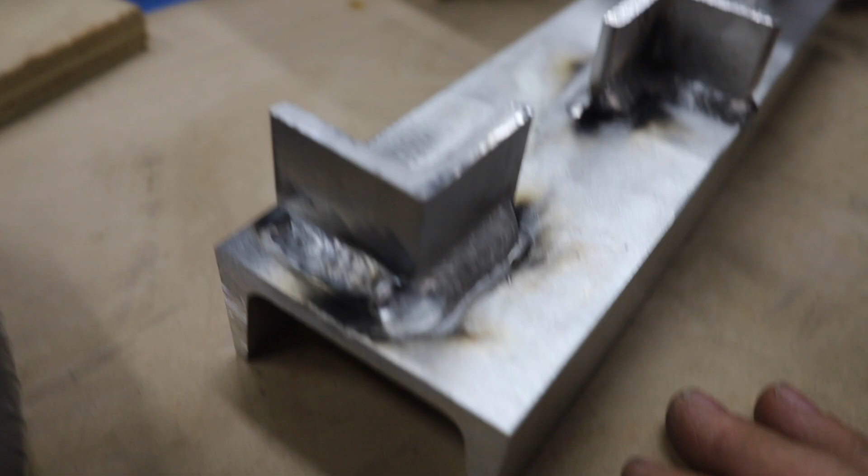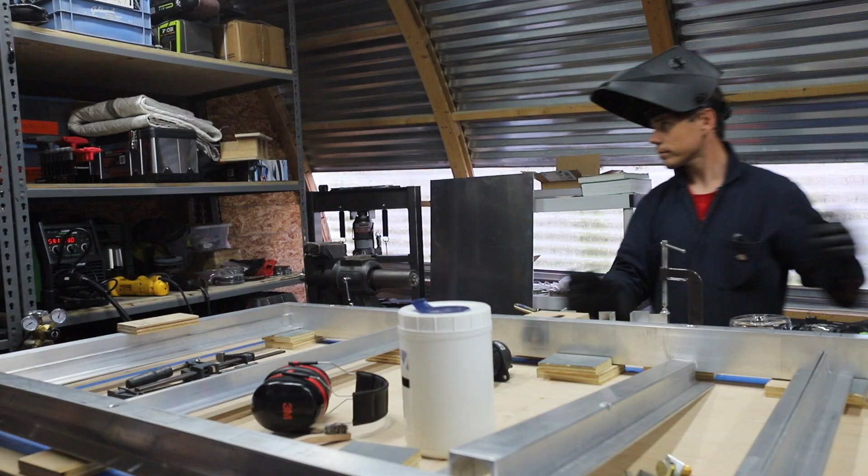Well, here we go. I don't know if I showed you my early practice welds, but here they are. While Christopher gets the frame ready for full weld, I am going to do a good bit more practicing. We had to move the welder over because we don't have long enough leads to reach from where it was. Kind of a pain, but I'll easily be able to reach the whole frame.

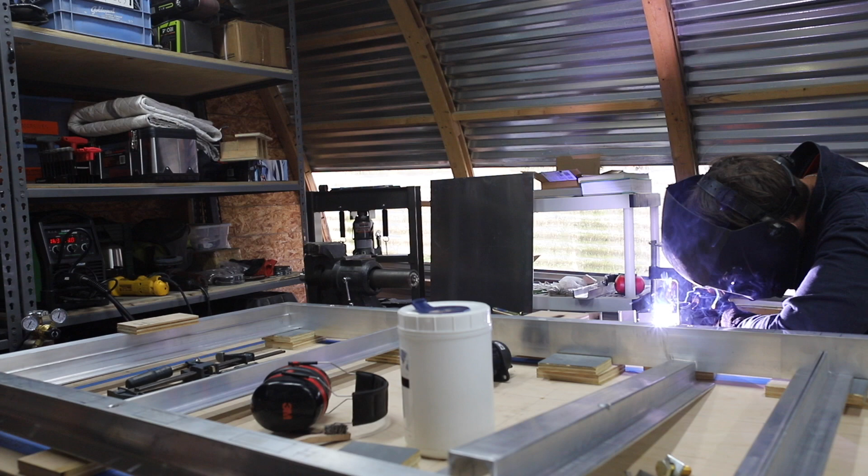Alright, let's do this thing. Any hobbyist welders out there looking to get into welding, go watch somebody else to learn. But I will share what I've learned: get your settings right, do some research to start with, and then fine tune what's good for you.

Get comfortable, being comfortable is important. And then practice your line a couple times before you actually strike the arc and weld, and get a good, solid, clean, smooth flow on your practice.

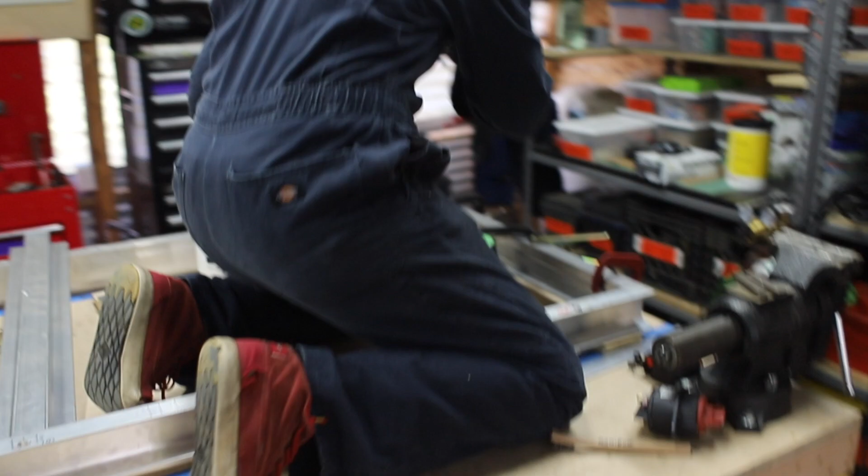So I talked Zach into giving me some spot welds before we continue so I can keep setting up. If these pieces are where they need to be, I just need to weld. And the guy just pops up on a table. Ready? Yeah.

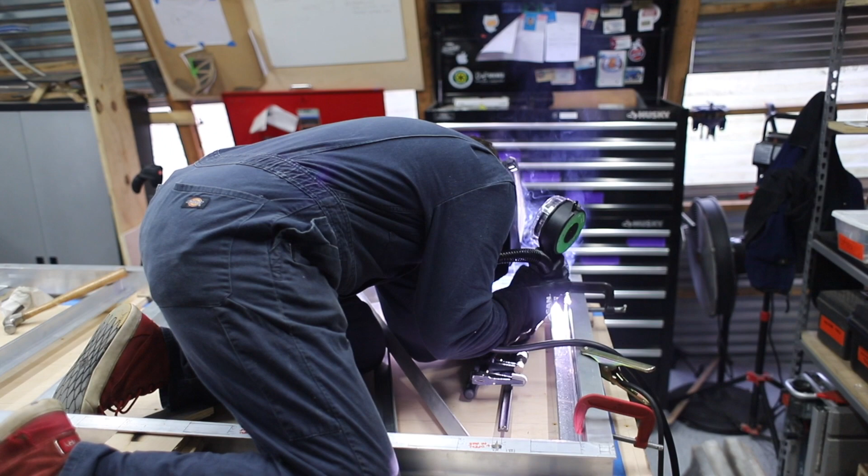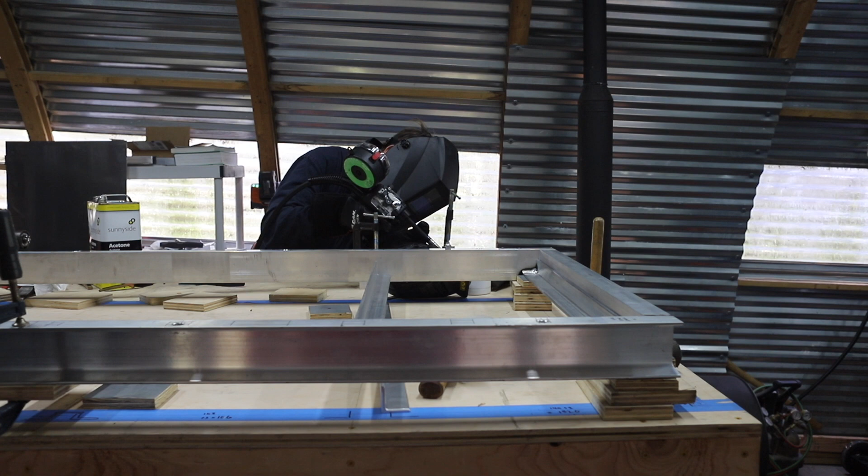Okay, I'm actually welding now. You're right, that's not a welder - that's the sound of me off screen with an oscillating tool fixing a mistake that I made.

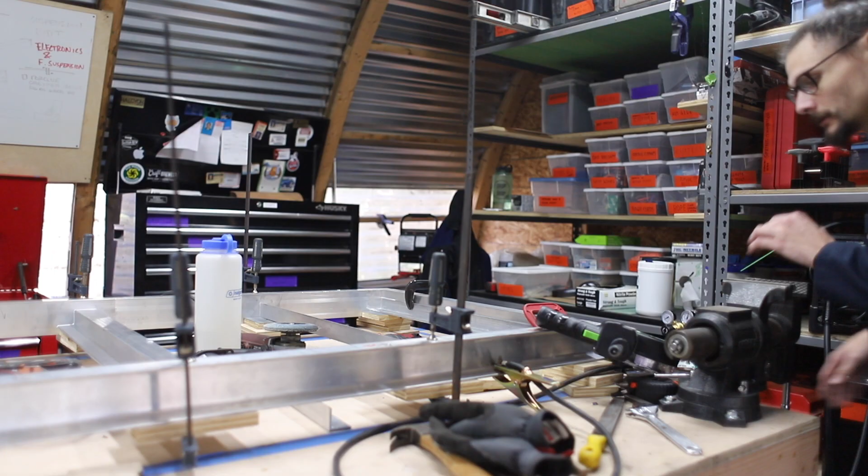Oh my gosh. Alright, yeah, we're finally ready for this. We are finally ready for this, very much so. Feels like we were here about 20 minutes ago, but...

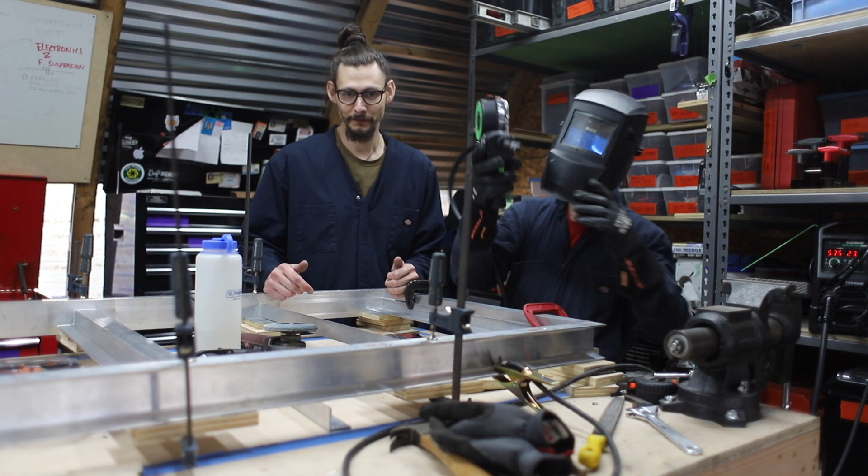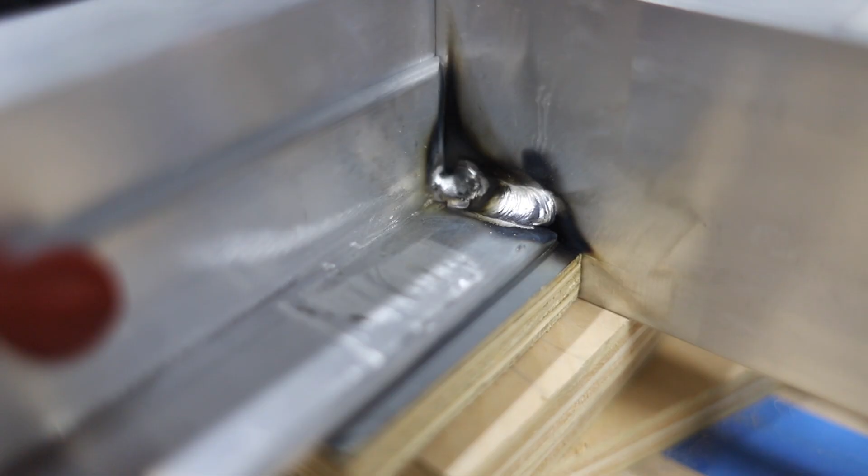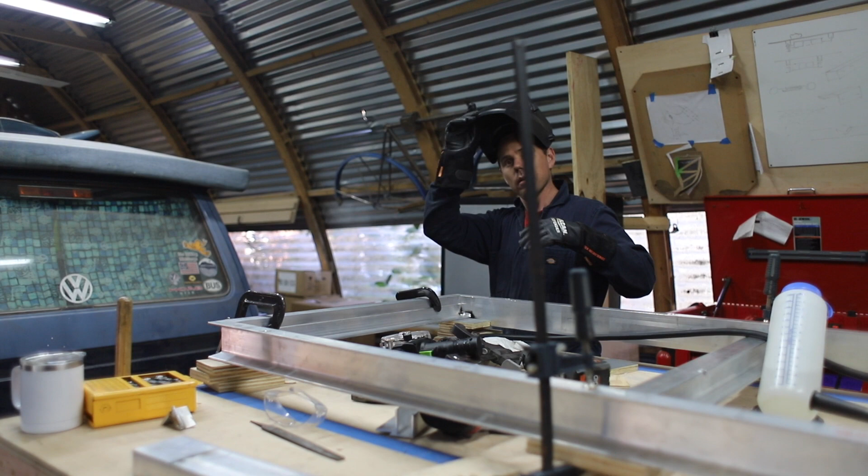I'm gonna get out of the way, you can tell by the angle. Oh buddy, oh, she's looking good. Okay. You're happy, I'm happy. I'm always happy.

Alright, setup number 2. This one's interesting because it's floating. The table has a dip in it, so we have to reference off the beam itself.

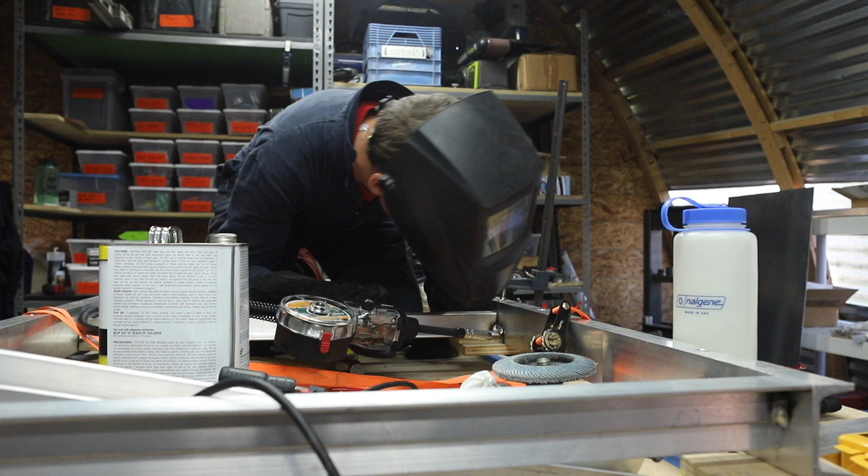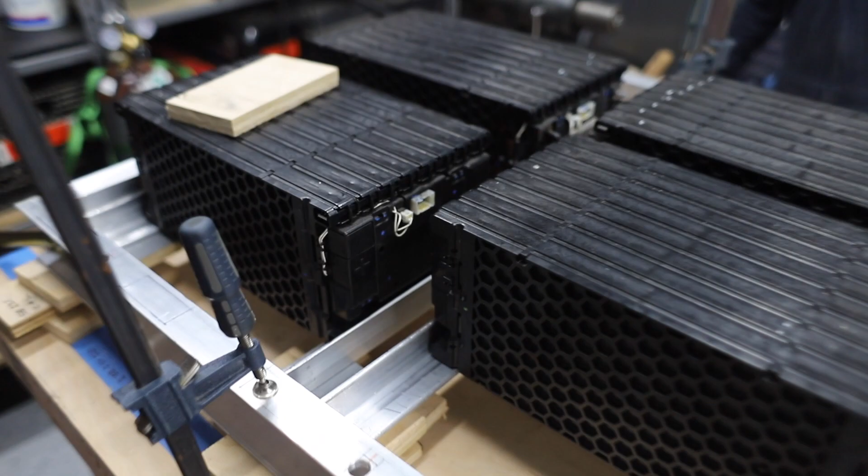Happy with that too. Okay, setup number 3 for welding. With the batteries in, we can double check all the numbers and get ready for the weld.

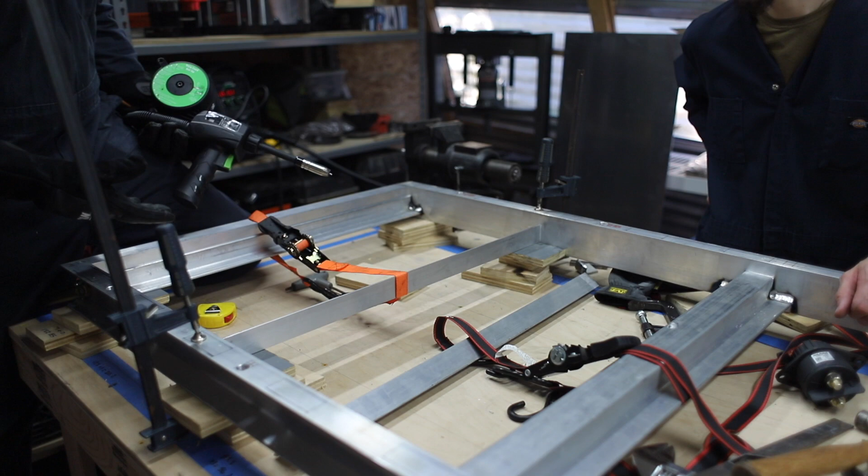What happened? Well, I left this strap on there without the batteries in there. As soon as that got hot, it fell out. Well, at least we caught it on camera - YouTube gold right there, right? Yep.

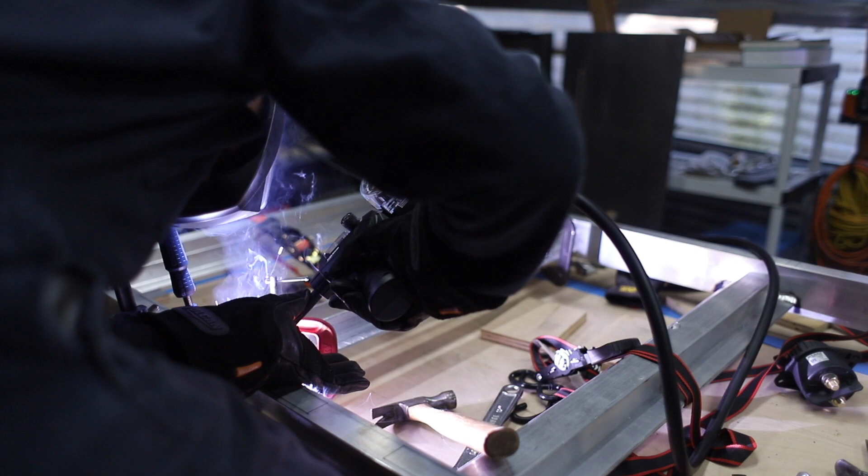Wangle dangle, wangle dangle, the man said. Just felt like it was appropriate at that moment. I was excited, this was the first thing that came to my mind.

Starting to get good at this, Zach. Yeah, man.

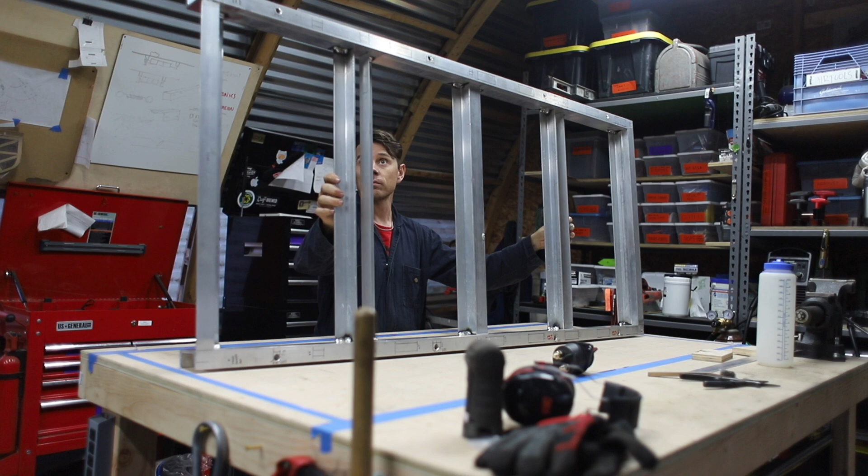Welds aren't totally welded up, but it's rigid and it's light. I really think maybe 30 pounds. Yeah? But it weighs so little. I would be interested to know what this would weigh in steel.

Feels like it's been a heck of a long haul day. You think so? It does feel like it took really long to get this done, not because it actually took long - we just made a couple mistakes. We did, yeah, but we took our time. If we made a little mistake, we didn't say good enough, we fixed it, went back and fixed it. Yeah, there was 45 minutes devoted to cutting a couple welds out and then putting them back properly.

Put some batteries in and look at it, because I think that would be fun to do. You think so? Well, we'll get a good idea of where our switch can go.

This switch, we got to figure out where it lives in the box. I want this switch in the box. We're thinking that we'll box out a little section right here, and from underneath it'll have a recess, and you can reach up in that recess and just click that switch off, and that'll kill the battery. Something like that - we'll see how it fleshes out when it's all said and done.

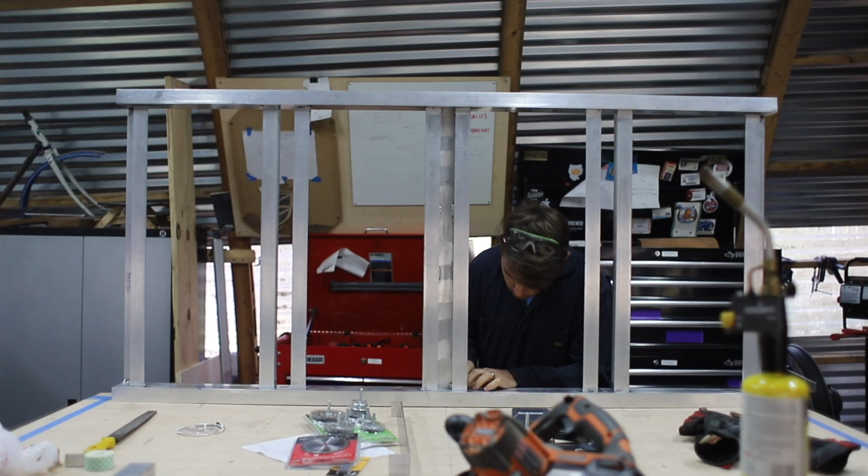Should probably put this down. Yep. In our own little windows.

Okay, well today we're back halfway through with a purpose. Last time we got these battery rails welded in, and they are just absolutely spot on. Zach's going to keep plugging away and welding that direction, finishing welding. I'm going to start playing with some aluminum bends. We got a couple test pieces, and they seem to be working pretty well. So we're going to walk you through how we do that, and then we're going to keep on.

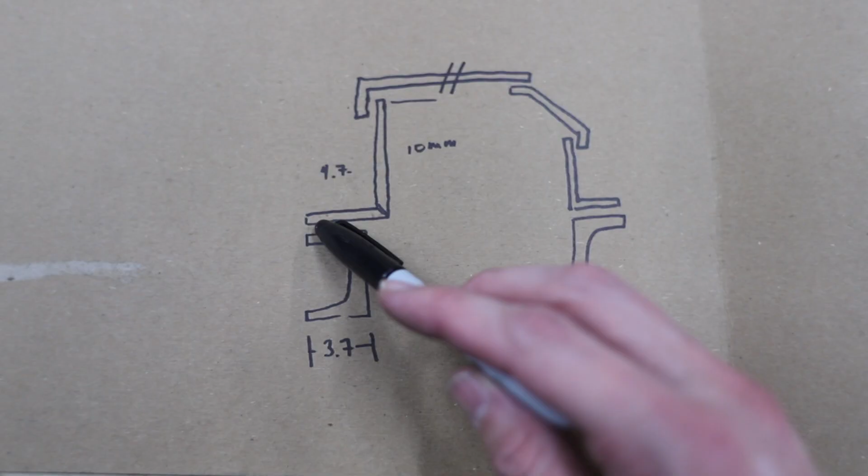We have a series of bends that need to go in this box because it is an interesting shape, and we're going to make the top out of multiple pieces of metal, so it's a little bit easier when it comes to actually assembly and fitment. Right now what I'm doing is some test pieces to figure out exactly how the metal bends, where it stretches at, and how big it is after the operation happens. I've done a couple of these. I got about 6 or 7 bends ready to go, and I think I got it dialed in. The secret is to know how much it's going to stretch after you're done. Take that into account from the get-go, and then it should be a perfect bend.

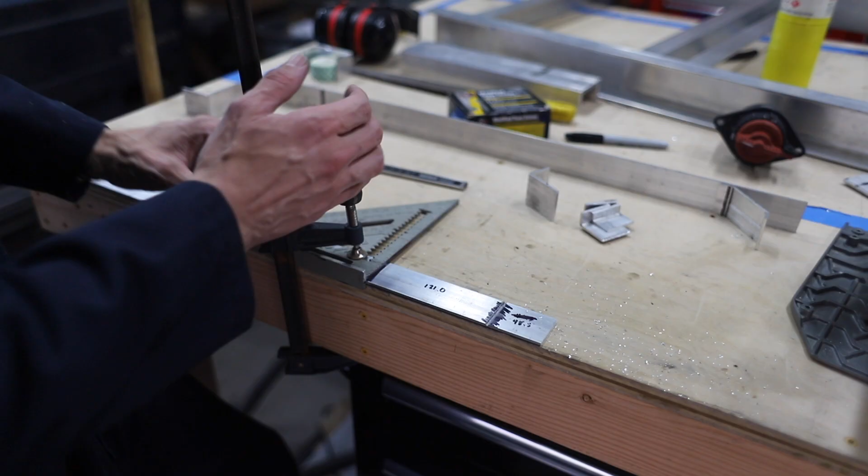My blade is on a 45-degree angle, and it does have a tiny little blade in here, just because the big one wouldn't work. But other than that, it's just a standard circular saw tilted at an angle. Because we went with a blade at a 45-degree angle, we get a nice 45-degree cut out of this. So the next step is to anneal the metal right here and then give it a bend.

This guy is very hot, so we're going to use this other aluminum as a heat sink.

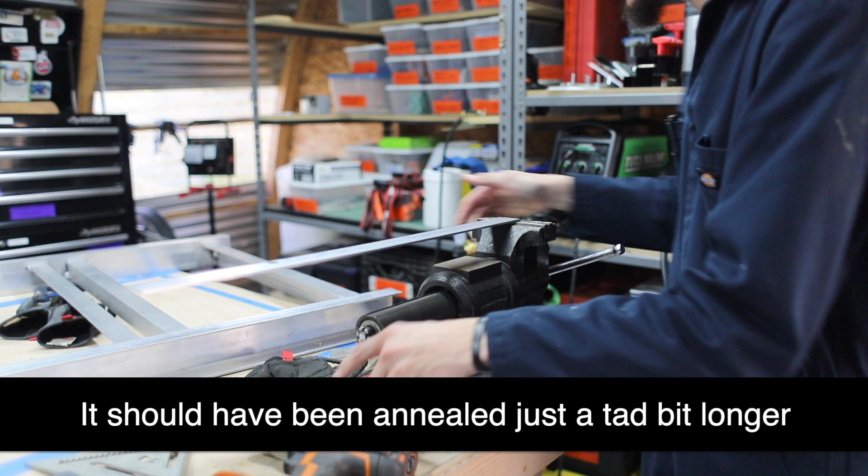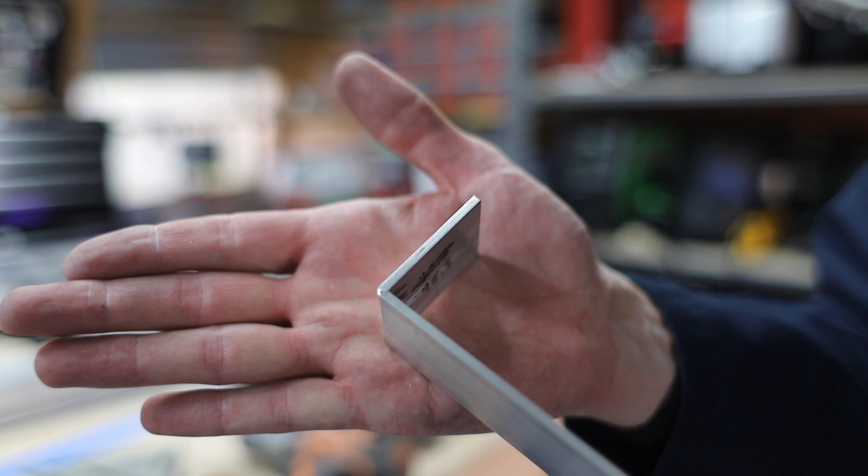Focus on that. Yeah, a little closer. Alright.

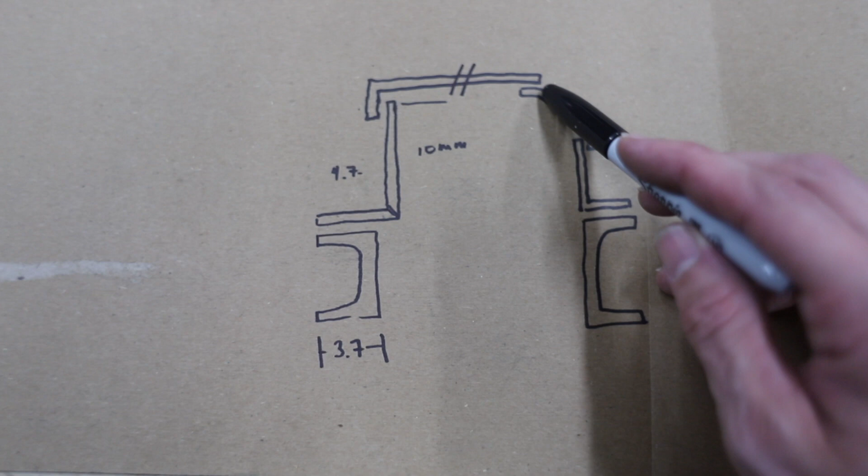This is kind of what we're going to try and replicate on the battery box lid. I know it doesn't look like much right now, but it is the direction we're heading. You can see the frame rails right here and the lid that connects the two sides. We're going to break it up into a couple different pieces so that it makes our life easier. One, so that we're not handling a big old monster piece, and two, so that if we have any misalignment in the process, we have room in order to kind of fudge the different fit pieces.

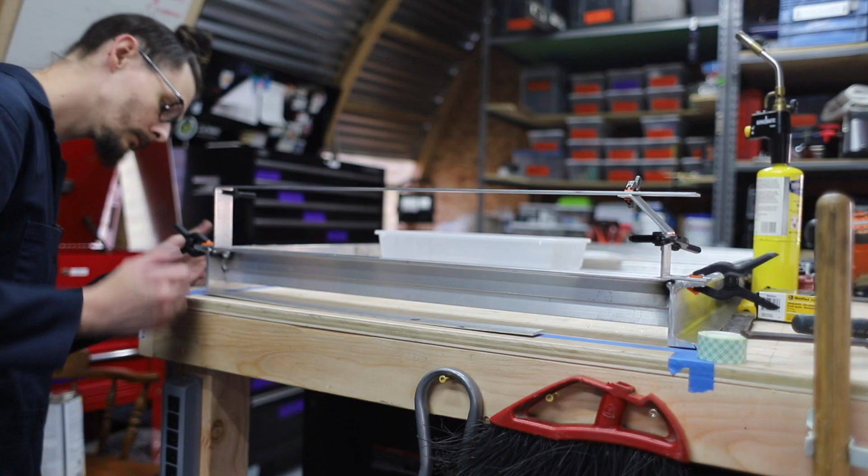Oh, it's perfect. 10 centimeters. That one's a little low. That's okay. I designed it that way.

Okay, here are those pieces that I've been working on. This is the profile I'm thinking that's gonna be the roof, the lid for the box. There's a couple interesting features. This side's straight, that side's got a little 45-degree corner cut off. That's so that our wiring harness can run through that void on the underside of the chassis. So that's a design feature. We'll also have room on this side of the bay for our on-off switch.

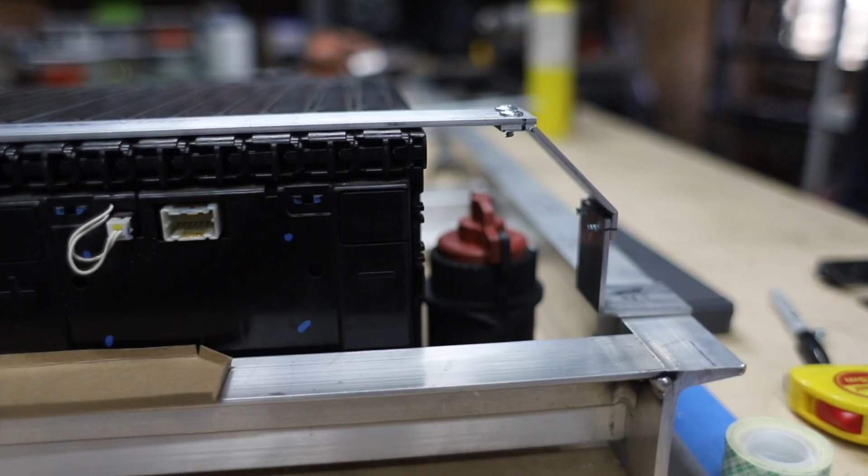And so this little shape has given us a little bit more room to work with. I think we'll go ahead and probably affix it so they don't come apart. We don't need these little clamps, maybe like Tek screws or some tiny little tacks. And then we're gonna look at some other things and see how the batteries and the switch fit up next to each other.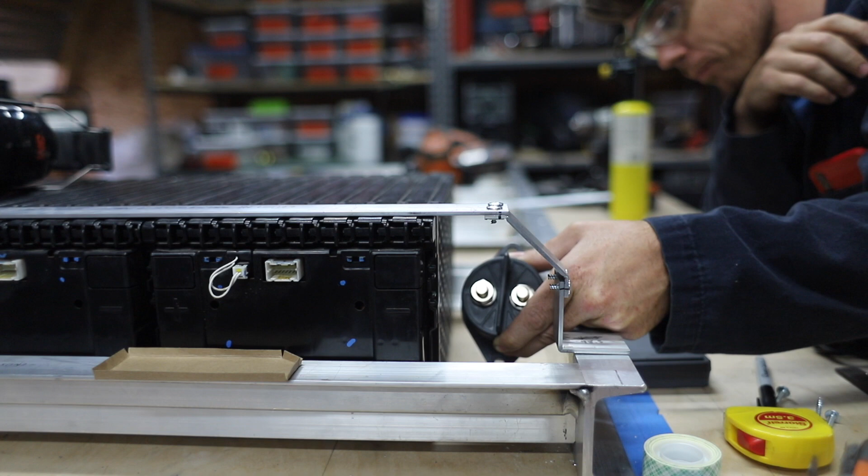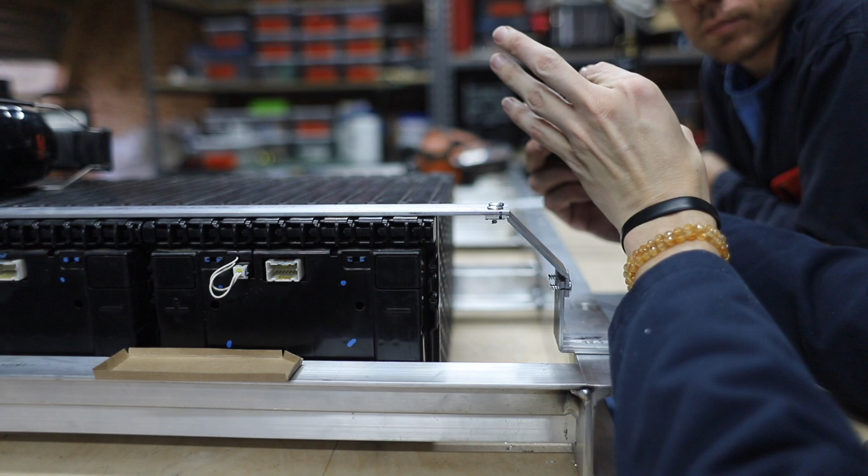Yeah, it's not happening. Why not? You wanted it a gangster lean? I just think it'd make it easier. How would that make it easier? Not easier to do, easier to get to when the time came. Easier to get to how? From what direction? So like, if you're underneath, if it's just like a hole, but if it's like this and then it slopes this way, you've got this clearance room where you can kind of reach in. So this is what I was kind of thinking. If we have it vertical like this, and in the open position it's sprung, and the closed position has a spring action that really wants it to just kind of clunk. So I was thinking there's a couple different ways you can actuate this, by spinning with like a socket and a spinner on it, or by pulling, like the fire suppression thing on a race car. And if we do that, a vertical thing where it's in this position and it slots down in here, we can run a cable into that from wherever we want to, yank on it, and boom, no more power.

Granted, we could do that in any other position, but if we do it from here, then we can have a straight shot right here at this firewall.

Because we're gonna have to cut a hole in that sheet, we could just leave it open and do the returns on that sheet. But I don't want returns on the bottom sheet. I want the returns to be on the box we put on, and I want that to be at the level of the bottom sheet.

So it goes foop, foop, then foop, foop, then foop, foop, and from the side, foop, foop, foop, foop. V grooves make it easier - you don't have to worry about getting things into a brake or anything like that, so you can just bend it all up.

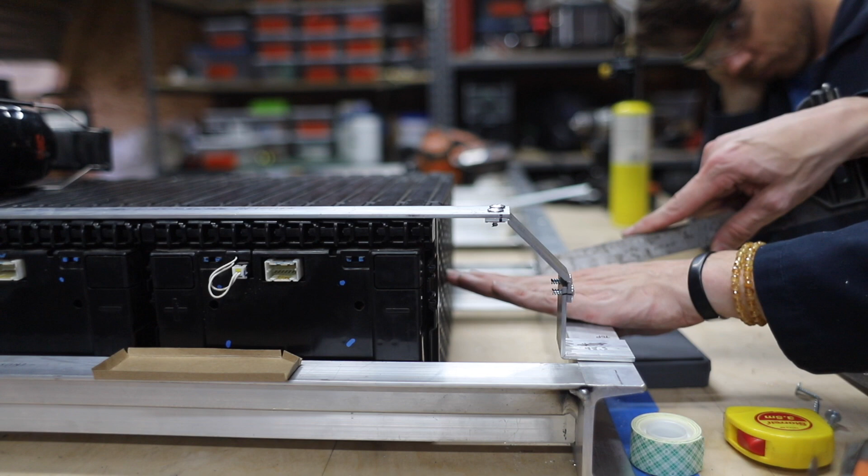So it needs to come and then go down maybe, and if that's the first piece, that's just a straight 90, and this is a separate piece, I'm okay with that too.

So we would keep the returns here and not put returns on the lid? We could do either or. I like the returns here because then you're plug welding from here down, not up. That's what we gotta be thinking about.

That one's also gonna have a hole in it too - yeah, giant friggin' hole like that. It's really not that complicated. No, it's just a box. I mean, it's all just a box.

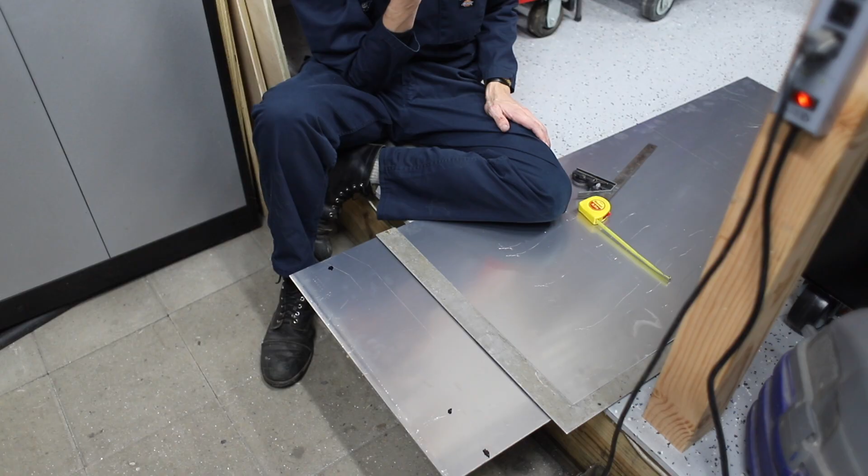This is what layout looks like when you have a small shop and your bench is full of battery box.

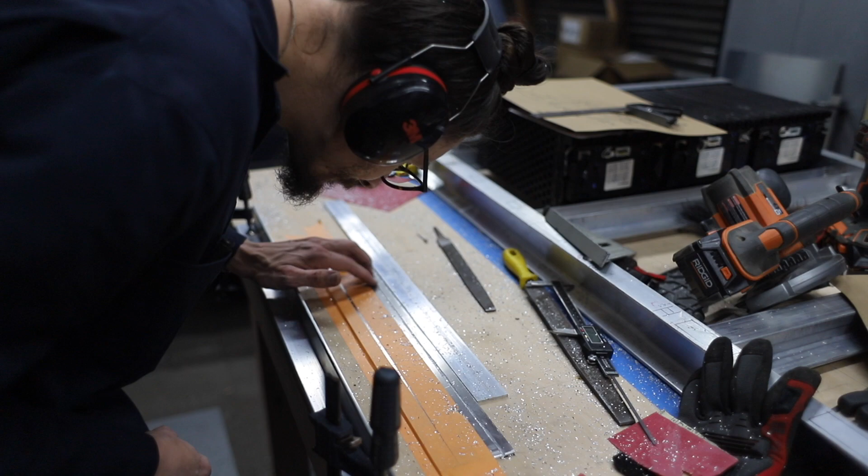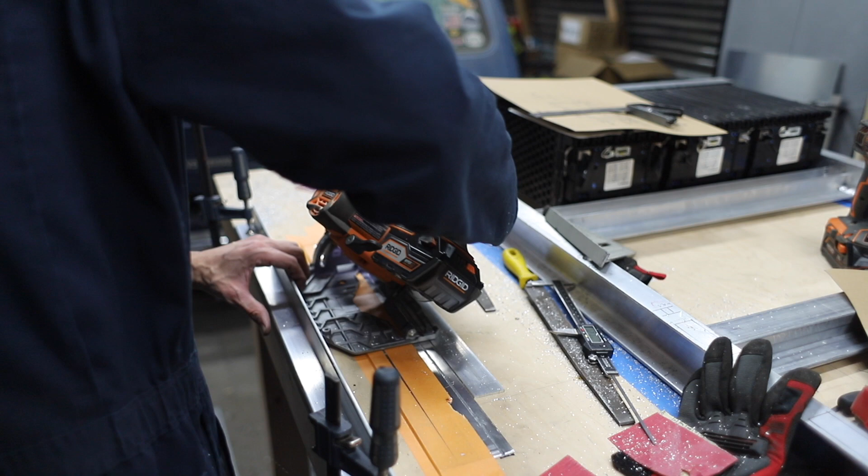A little bit better second go.

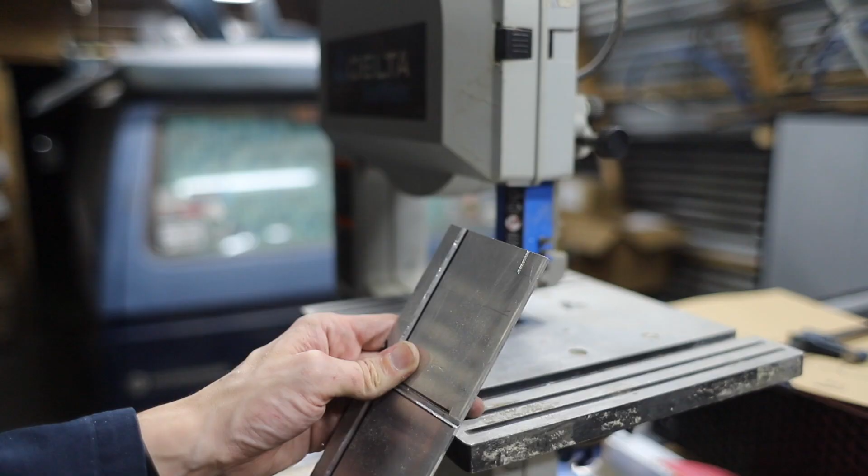This is what happens when you don't anneal it. Well, I don't know if that was an accurate representation of what happens, but it's more brittle.

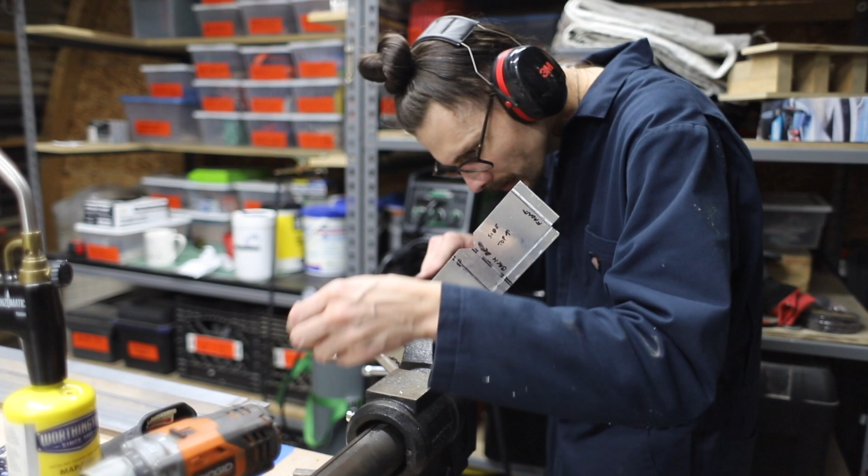That needs to be cut.

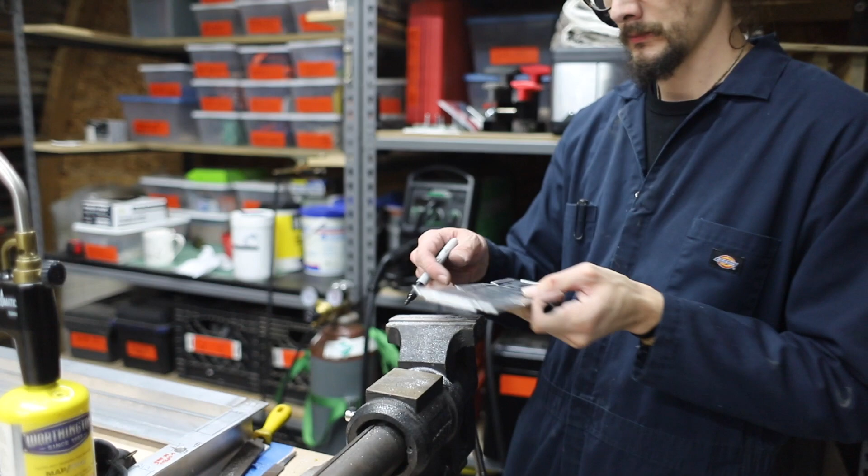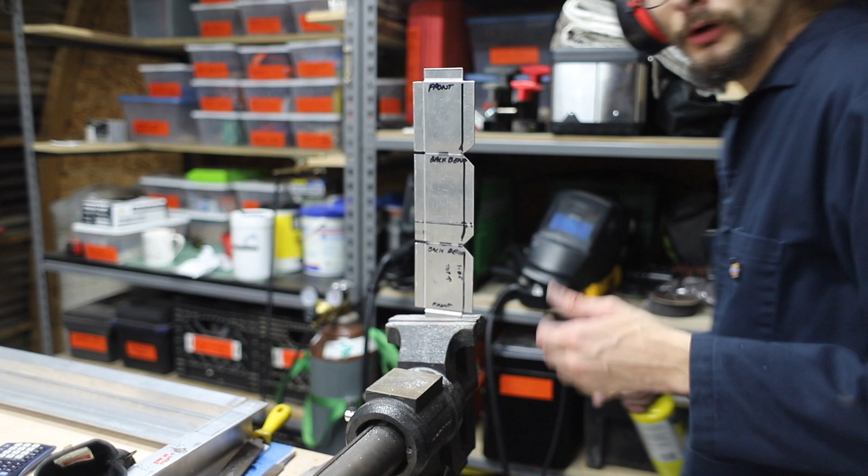In lieu of a proper temperature control device, some people will use wax crayons and stuff like that, and they melt at a certain temperature. We don't have any of that - we're going to heat this up until the Sharpie disappears.

Okay, now we wait till it cools down so we don't burn ourselves.

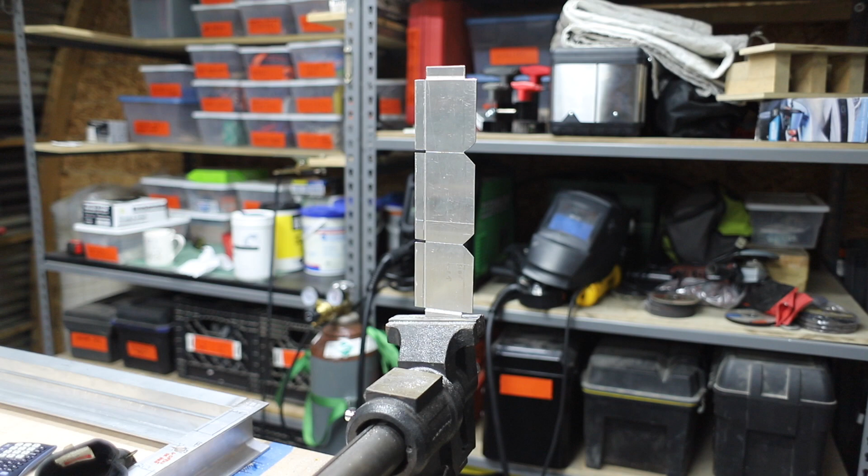I heard the Sharpie trick a while back on somebody's channel. I don't know if it's entirely accurate, but I did notice that at the higher temperatures it does burn off. So I'm just gonna go with it.

Alright, so this guy's cooled. Should be ready to be bent.

We spent all this time and energy putting effort into getting these lines and these scores in the right place, so it should just fold up into a nice little box. Let's see if this happens.

Oh, it's bending so easy, I don't like it. I don't like it.

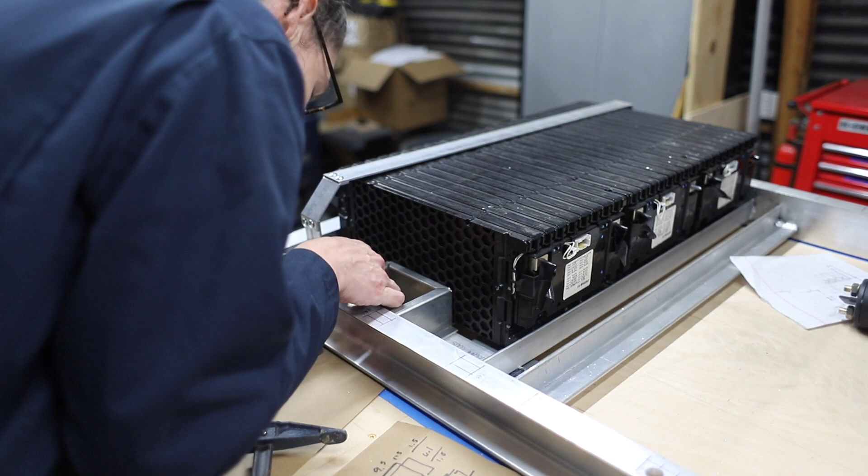All right, let's take a look, huh? Gosh Zach, this is amazing. It fits.

So this box will make it so that we can access our switch from underneath. We still have to just make a lid, and it will seal the outside from the inside and still give us access to our switch.

It all went swimmingly. We're about to run out of battery, I think. End of an episode. We're all very excited, lots of progress. Actually I am pretty excited, we did make lots of progress.

I got some welding done, but the big win is definitely our switch box that bent up so nicely and fits so perfectly. Just absolutely primo, I don't know if we could have asked for better. We keep going on about how things are fitting well, but honestly, with a project this big, we hadn't had that many screw-ups, and it's a blessing.